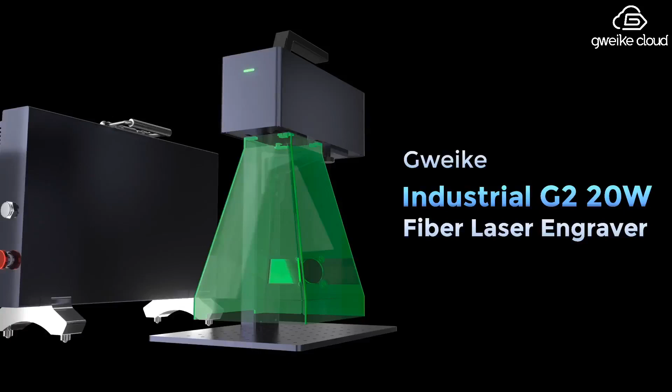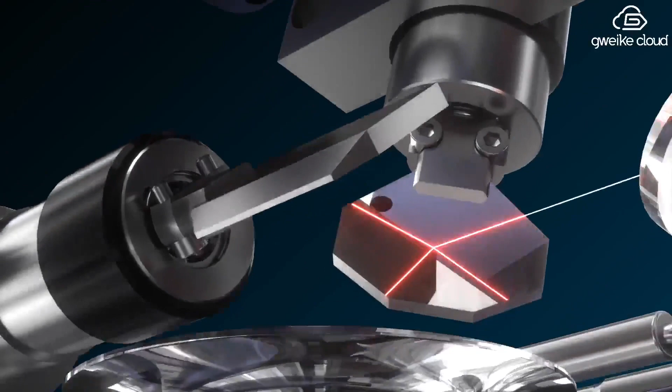G2 Laser Marker, an ultra-portable industrial-grade fiber laser marker. Equipped with a 20-watt fiber laser and high-speed galvanometer, it can easily engrave various materials. It has an engraving speed that is more than 10 times faster than competing products, and the engraving accuracy has been improved to 0.001 millimeters.

Wow, such a big helmet. What should we do? Don't worry, this is how it's solved. With its compact size, you can easily place it anywhere.

Want more interesting patterns? So easy! Just take a photo anytime and start engraving.

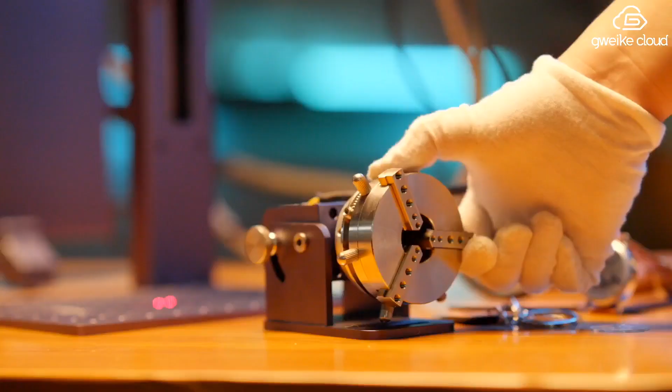With its large working area and electric lifting feature, even large objects can be easily engraved. It can also easily handle objects with irregular surfaces and even rotate the main unit directly to adapt to any engraving angle.

Batch processing is more efficient. Whether it's large tools or small accessories, it can handle them easily.

You just imagine and leave the rest to the G2 Laser Marker.

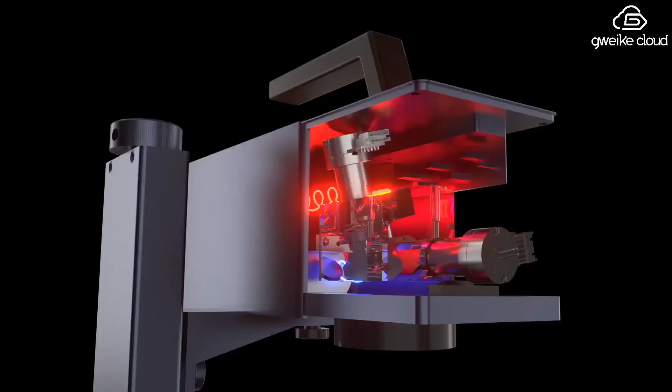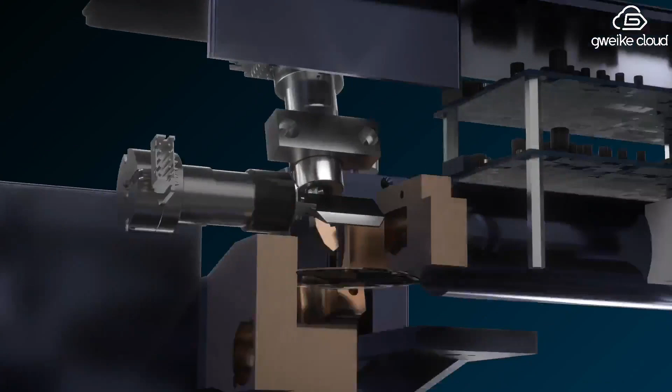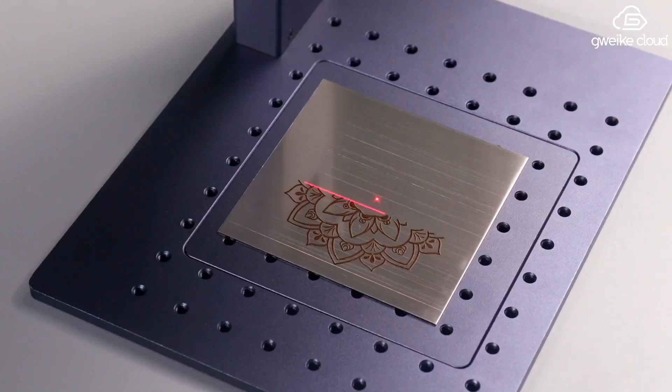Hi, this is the G2 Laser Marker, an ultra-portable industrial-grade fiber laser marker. Equipped with a 20-watt fiber laser and high-speed galvanometer, it can easily engrave various materials. It has an engraving speed that is more than 10 times faster than competing products, and the engraving accuracy has been improved to 0.001 millimeters.

Wow, such a big helmet. What should we do? Don't worry, this is how it's solved. With its compact size, you can easily place it anywhere.

Want more interesting patterns? So easy! Just take a photo anytime and start engraving.

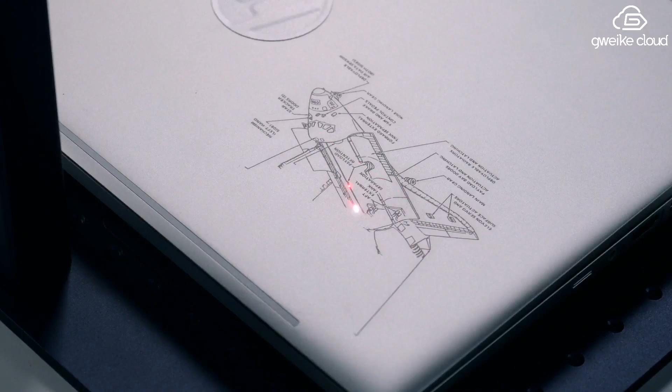With its large working area and electric lifting feature, even large objects can be easily engraved. It can also easily handle objects with irregular surfaces and even rotate the main unit directly to adapt to any engraving angle.

Batch processing is more efficient. Whether it's large tools or small accessories, it can handle them easily.

You just imagine and leave the rest to the G2 Laser Marker.

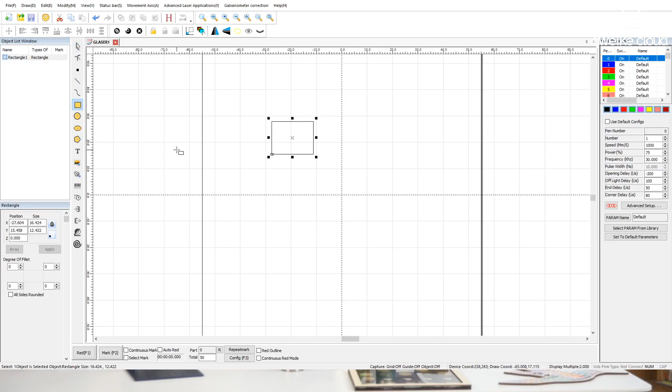Next, we have the object list window. It is situated on the second left part of the scene. When you draw multiple things, you can see right here - use the rectangle, circle, text 1 - and you can drag those things to change the sequence of it. Say I want the text to be number 2 or number 1.

Okay, I can use this - I can drag it and then double click to change its name. For example, I want the text to be text 1, text 2, or anything like that. So it gives you a better arrangement once you work on objects or the work that you're doing.

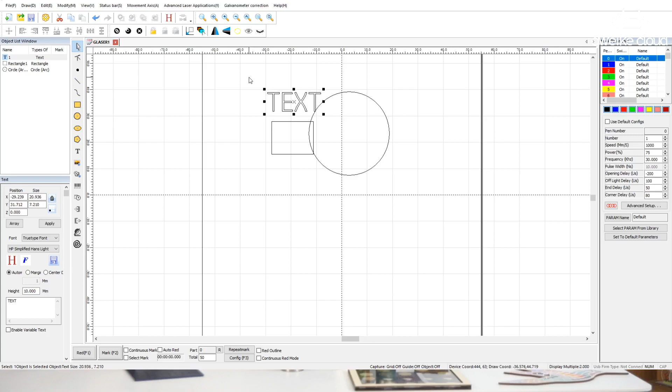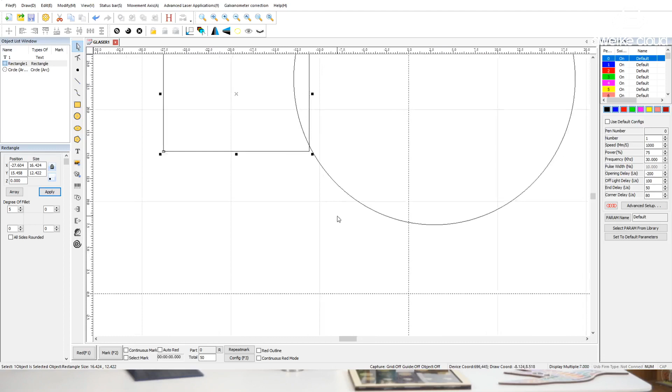The next one right below it is the object property window, right down to the object list window we're pointing at now. For example, if you draw a rectangle, it shows all the parameters - Y is the axis and all sides rounded stuff. You can change the parameters for how you'd like your rectangle to have different kinds of shape angles.

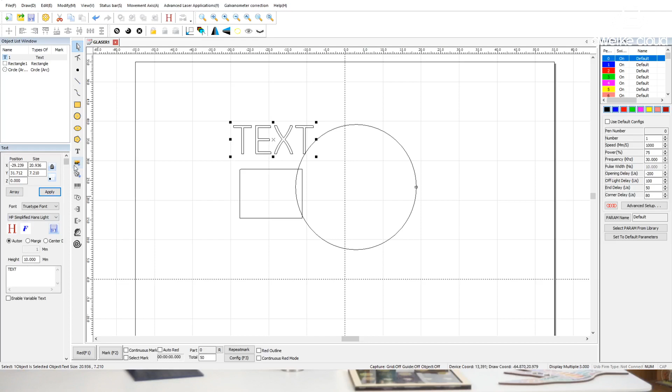Then we're going to draw a circle as well - that's the parameters of a circle, and that's the parameters of a rectangle. And for text, you have auto, central, and different types and fonts - whatever kind of text font you want for your words.

We can also import a pattern, and we can do the same with a picture, but pictures have a lot of things down there. We can also add 2 groups together - that's for the group, you have to change the size and everything. This is the picture too, once you import it to the software.

You can group two together - yeah, this is a group. You can ungroup it if you want, or put two objects together to set up a group, and then you can set their parameters together.

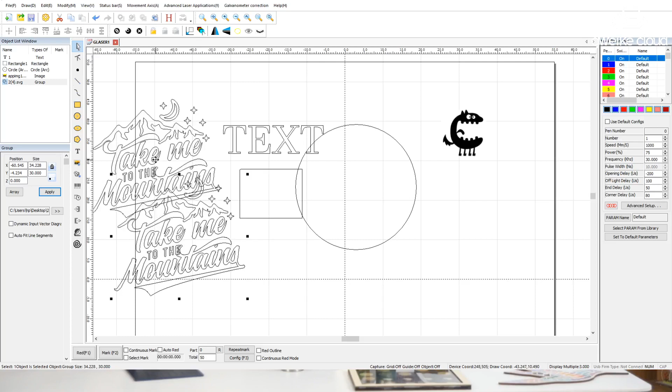Okay, the next one is the mark parameters, on the right side of this page, you can see that. It has on and off - so double click, you can turn it off, meaning you don't want to operate it right now, but you might get back to it later on. Then you have different colors of pencil. People ask why you have different colors of pencil - first thing, that represents different types of pencil.

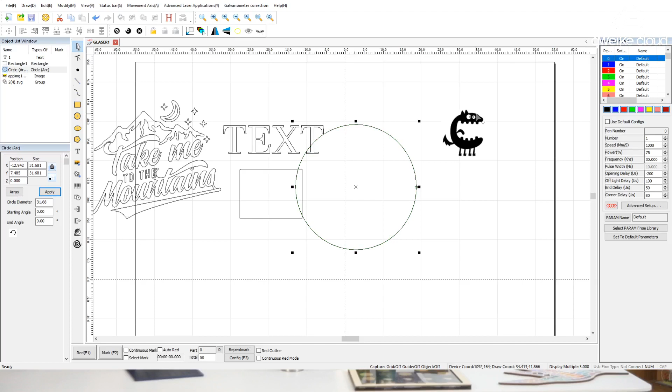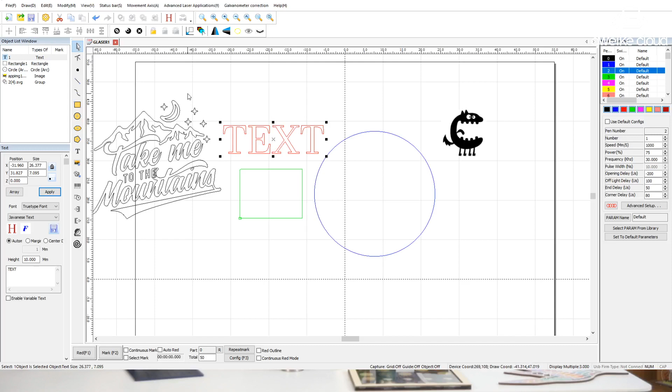So you have different layer things, and remember the circle right now is a blue color, the text right now is a red color. Then you set it to the red layer. So whenever you want to get back to this red color to change its parameters, you can just directly click the red color. It adds a color, but it also works as different types of pencil. You can change the objects, the settings, and everything like that.

So the next one, we're moving to the downside of this page. We're going to start with the red F1. Red F1 marks the outer frame of the pattern to be marked, but does not emit laser light. It is used to indicate the processing area and facilitate the user to locate the workpiece. This function is used for marking machines with a red indicator light.

Press F1 on the keyboard and execute the command. You're good to go, just hit F1 and hit the Y button. You don't have laser right now, but it works like that.

Okay, we turn to the next one, mark F2. It's the starting processing, so press F2 on the keyboard to run this command. Then you have continuous mark, which indicates that the current file is continuously processed without pause. Right next to it is the auto red, situate object position.

And then you have parts, which represents the total number of parts currently processed. And then you have the red outline—when this function is checked to display the red light, the outline of the graph can be displayed.

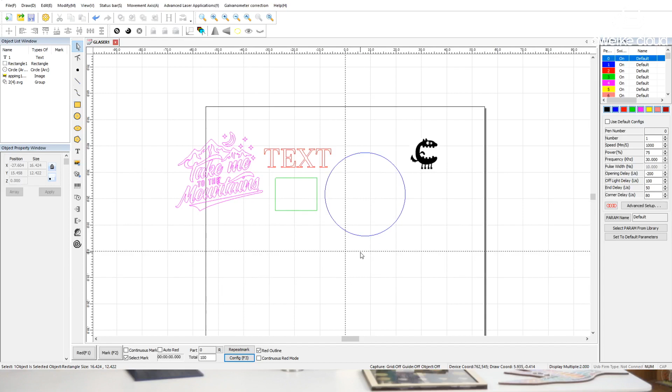So how to do it: once we open the G laser, we'll click the vector button right there. You see that it's on the left, around number 12 or 13, and then you see this drop vector file, and you click it.

And then you could choose the depth engraving pattern that you want to operate. Adjust the dimension and center it, and you also choose the center button to center it.

And then you select the file. You click the fill button. Where's the fill button? It's on the top column.

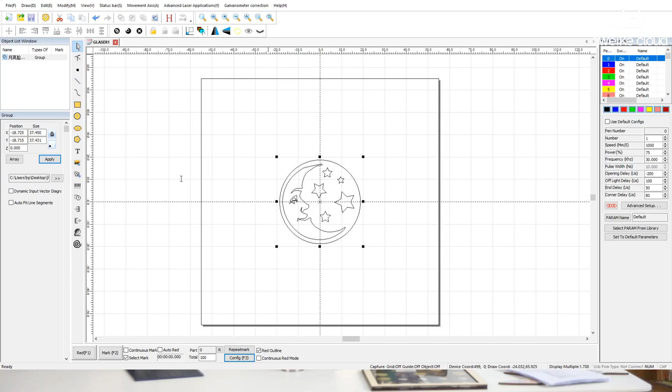And then you choose the type, and you set the angle to 45 — that's only for this picture. And then you also choose the line to 0.02. And then you click OK.

Remember, what's important about this software is the total number down there. So once you set all up, you're going to choose the total number. You're going to change it to 50 to 100. It really depends — you can adjust it depending on the depth you want.

And then once you finish with the total, you're also going to go ahead to the pen type as well, by setting the pen number references like speed 1000 millimeters per second, power 75%, and frequency like 30, something like that. And once everything is done, you can start your job.

It is very easy to set up, but probably it takes some tries once you start — it takes some time to try it out, whether it's really working or not. Maybe the parameters, different kinds of effects, different kinds of materials you want to go with it. It'll take some time to warm up.

If you feel like right now it's just too much for me, we're going to support a library soon. So once you get the machine to work with the library, it's only going to get easier because you're familiar with that software. So stay tuned, guys.

Stay tuned. Next, we're going to teach you how to install the software and set all the parameters about this software on the macOS system. It is different and totally apart from the Windows system, so we're going to further examine how we're going to set it up in macOS.

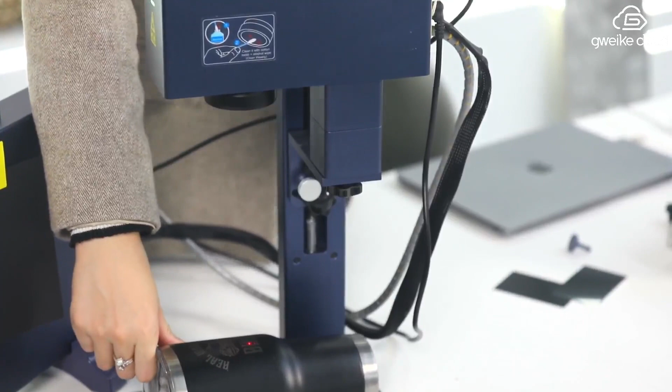People just making fun of me because I'm stupid right now. Oh, this is how you add 2 blocks on there.

So now you see you've got enough room to put cups underneath of it. You get enough room there, so you can further engrave on it.

And we're going to show you the chuck rotary a little bit. So the chuck rotary was...

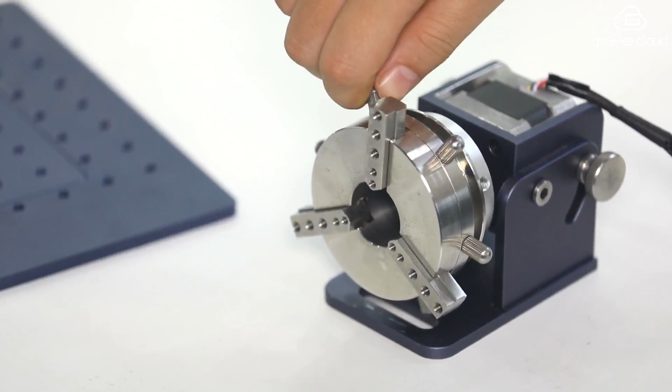So next time you operate the chuck rotary, it'll be easier. So let's put a ring on it.

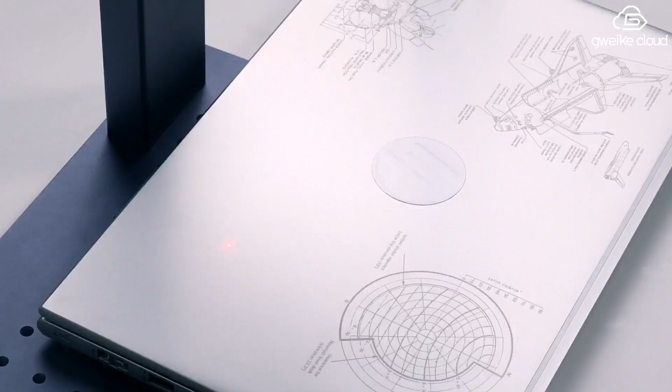Want more interesting patterns? So easy. Just take a photo anytime and start engraving.

With its large working area and electric lifting feature, even large objects can be easily engraved.

It can also easily handle objects with irregular surfaces, and even rotate the main unit directly to adapt to any engraving angle.